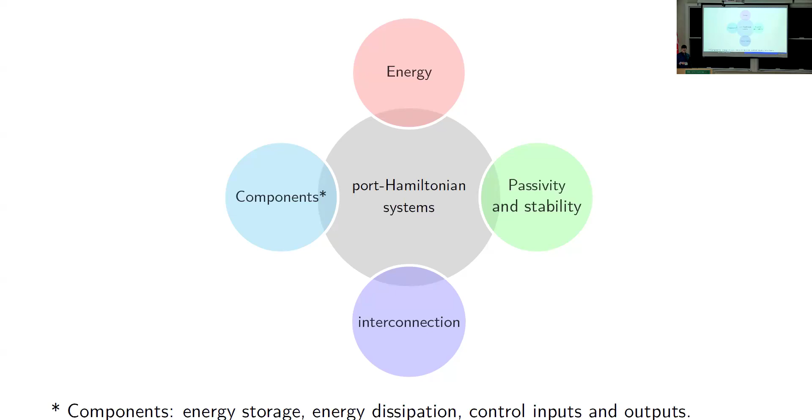And then to say that this is a Port Hamiltonian system, I need to satisfy these properties of these matrices. And then each of these matrices has actually a physical meaning. So as I said, H is the Hamiltonian, so it represents the internal energy of the system. J represents the internal structure, how the energy flows between the different states. R is the dissipation in the system, or the loss.

Then G and P are the port matrices. So these are the matrices that communicate with the external world in a way, with the inputs U and the outputs Y. And then we have the feed-through term, which goes directly from the inputs to the outputs.

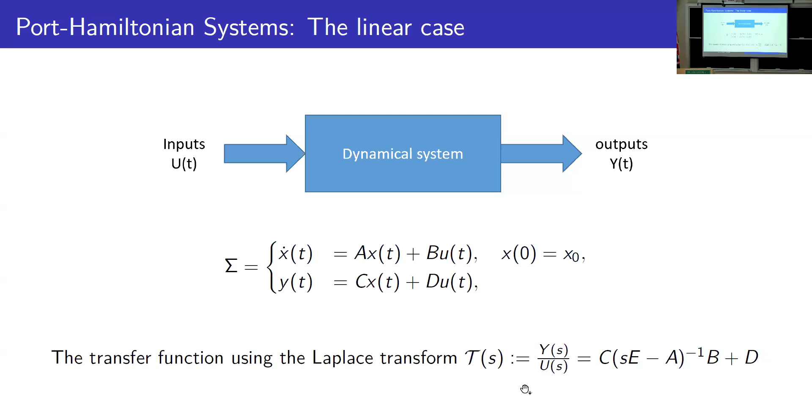So consider a linear system, A, B, C, D, and then we can also write the transfer function using the Laplace transform that describes the relation between the inputs and the outputs in this way. Then if we are in the linear case, we can write our Hamiltonian as the quadratic function in terms of Q. And then I can rewrite my nonlinear Port Hamiltonian system in this linear fashion, where now J minus R times Q is basically my A matrix.

And then G minus P is the B matrix, G plus P transpose Q is the C matrix, and so on. And then I have also the usual conditions, and then we can say that this is a linear Port Hamiltonian system, and we can see the relation to the standard linear systems. The difference is that now I have a physical meaning for every matrix in this model. So J, as I said, represents the internal structure, R is the dissipation, and so on.

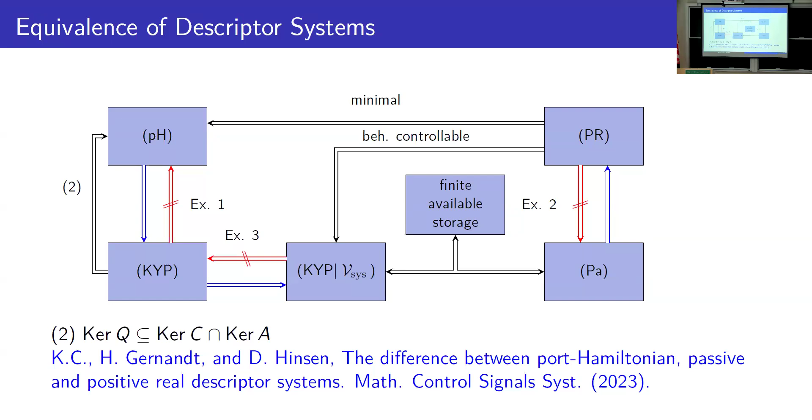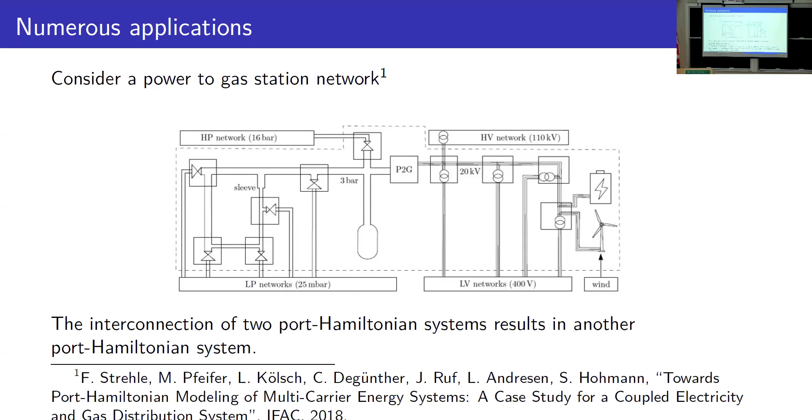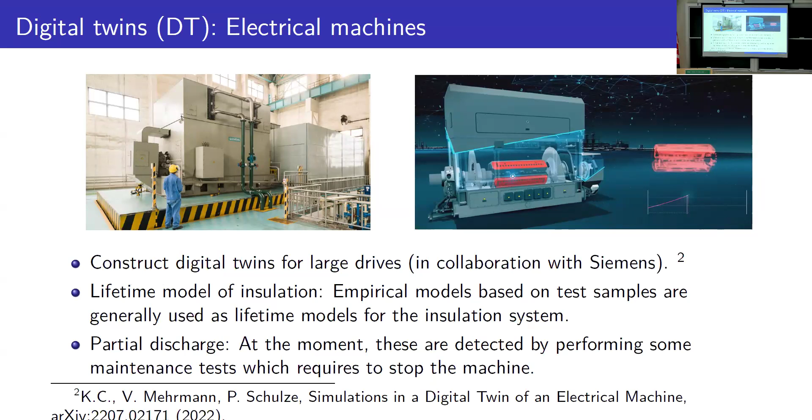And of course we don't want this. We want to predict it in advance. But the problem is that this partial discharge phenomenon is not very well understood, so we don't really have models for this. What people are doing right now is to actually stop the machine and do some tests. But we want the machine to run as often as possible. So one way to do it is through data-driven modeling. If you are more interested in this application, you can have a look at our arXiv paper here.

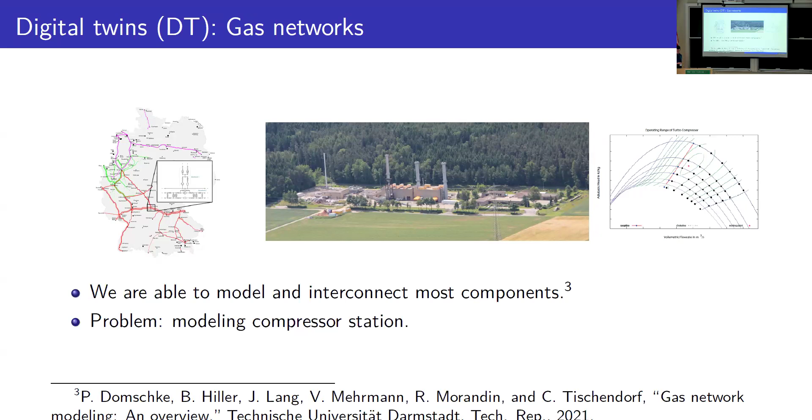And now there are a lot of works using neural networks, but most of them only consider one part of the system. Most of them focus on the dissipation because usually that's the hardest part to model from the physics. But what we are trying to do in this work is to model everything from data. So we don't assume that we are given J or R or the Hamiltonian. There's also a lot of work in learning Hamiltonians, and this of course comes from the people who work in physics. I'm also not mentioning other papers that maybe focused on one part of

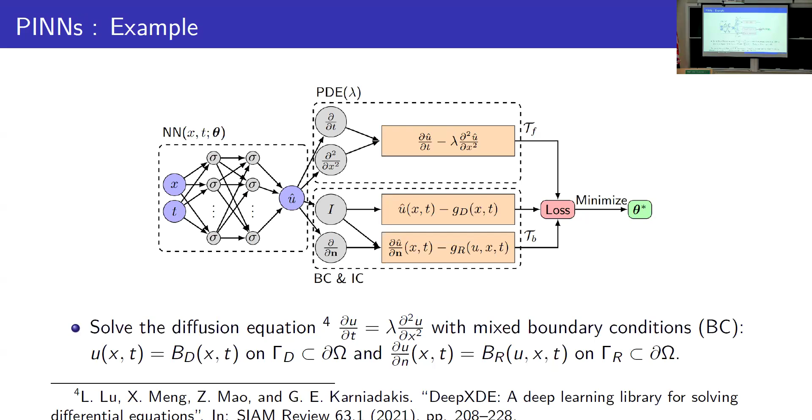I'm not going to talk about PDEs. I'm just going to stay in finite dimensional systems. This was just to illustrate what we are trying to do. And then you can write the loss function in terms of the physics parts, and at least in the PDE case, in the inverse problems, you can write it this way, but we can use something similar to enforce the structure, the physics part in our case.

Okay, so let's consider first a very simple system. Consider that Q is identity. So we have x dot equals (J minus R) x. The first method, which we call the direct method, is to apply what I just mentioned about PINNs directly. So we have the dynamics part, where we train the model to minimize the difference between the observed trajectories and those predicted by the model. And then we have the physics part, where we have a special structure for these J and R matrices. So J is skew-symmetric and R is symmetric positive definite.

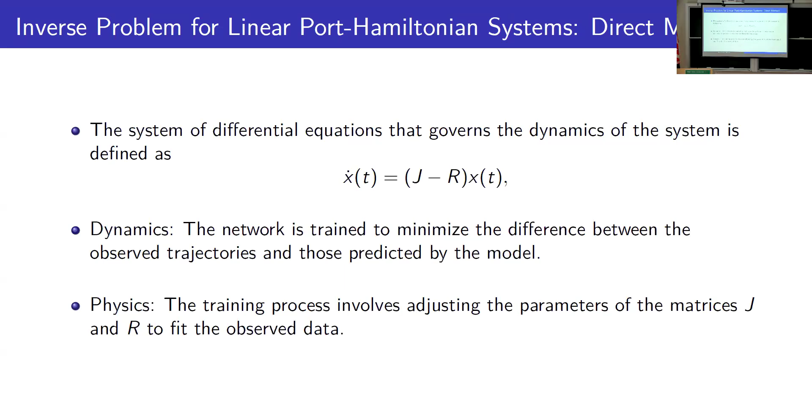So how do we do this? We take time as an additional input, as is usually done nowadays with PINNs. And then we train the model for initial conditions that are the unit vector for each state. So if we have a 2x2 system, it would be 1, 0 and 0, 1. And then we take all those trajectories and feed them to the neural network. So that's our direct method.

And then how do we test this? We test this with the Frobenius norm of the A matrix. So we reconstruct A with J minus R, and then we compare our original one and the one obtained using the neural network.

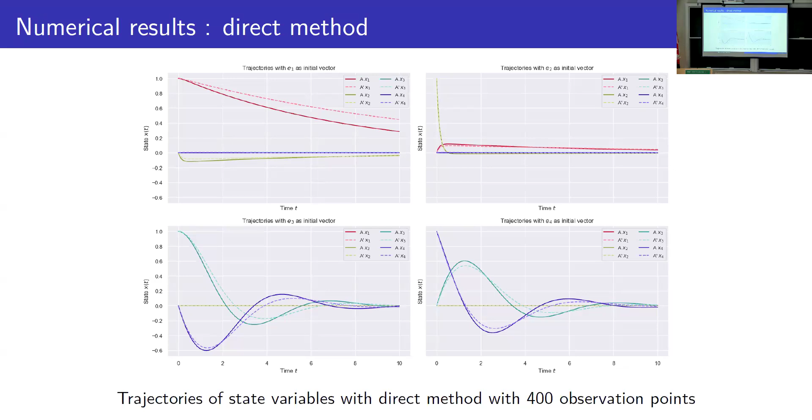So what is wrong here? It looks like the neural network is trying to fit or gives more importance maybe to some initial conditions than others. So what we did is actually try to enforce it or force it to basically take all initial conditions. And now I will explain how we did that.

So what we do is now we train all the initial conditions separately, and then we merge them together. So during each training session, we'll get some different J's and R's. And then the approximation of the trajectories will be these W's. So W of J is written in this way, where E_i is the unit vector for the specific initial value, and then W_R can be written this way.

And then we put them all together in this big trajectory matrix P_J and this big trajectory matrix P_R. And then our claim is that these matrices approximate the exponential of JT and exponential of RT. And now, basically, these are the general ones that can handle any initial value.

And to see why this is true, consider the first state, or the state for the first initial value. It is exponential of AT times E1, and E1 is the first initial value, and then this will basically take all the columns that are not the first one as 0, because it is 1 and all zeros. So basically it takes the first column of e^AT. And basically we repeat that with all the initial values.

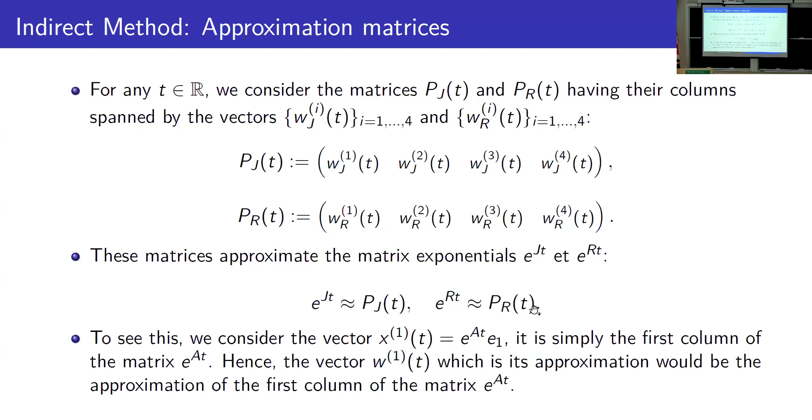How do we do this in practice? So we compute the eigenvalues of the approximation matrix that we obtain from the experiments. And then we also use the eigenvectors, and then we put everything together to reconstruct J and R. And then finally we can reconstruct A as J minus R.

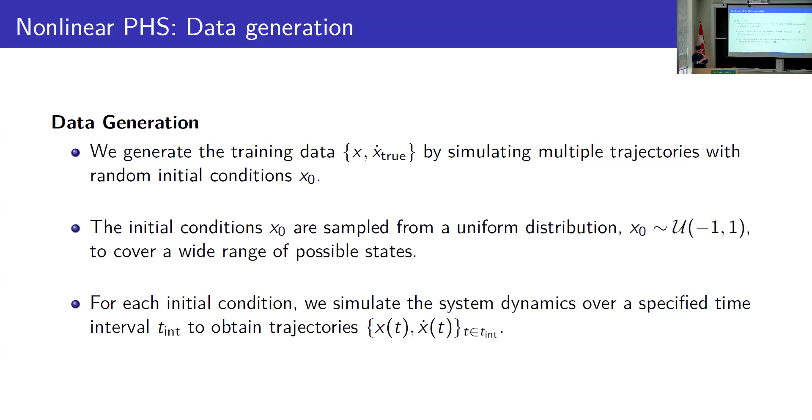Okay, so now to the setup. We generate training data by simulating multiple trajectories with random initial conditions, taken from a distribution. Then for each initial condition, we simulate the system over a specific time horizon. And then we train the system with a loss such that our obtained system is close to the trajectories of the observed data. The other stuff is as usual. I will skip that and go directly to the examples.

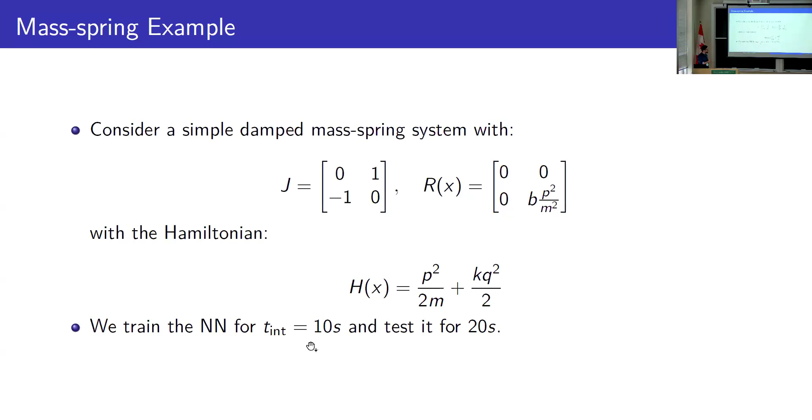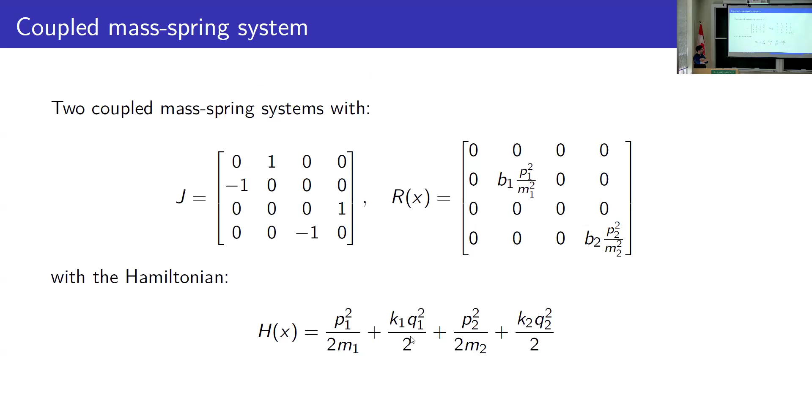Okay, I think I'm running out of time, so I'll go directly to the future work. There's still a lot of ongoing work in this project. We want to test combined nonlinearities because, in the examples we took, we only considered nonlinearities in either J, R or the Hamiltonian. Now we want to combine all of them and see if it works. The other one is to include inputs and outputs. I've been saying that Port Hamiltonian systems are important because of the ports, but I didn't mention it here; we already have some preliminary results, but we're still working on it.

Then, to apply it for digital twins that I mentioned earlier, where we will have to deal with noise and other problems from the measurements. And finally, these methods usually don't work very well for really high dimensional systems, or take a long time. So we are thinking about learning embeddings or reduced order models directly from high dimensional measurements, for example using autoencoders, but this is still just an idea at the moment.